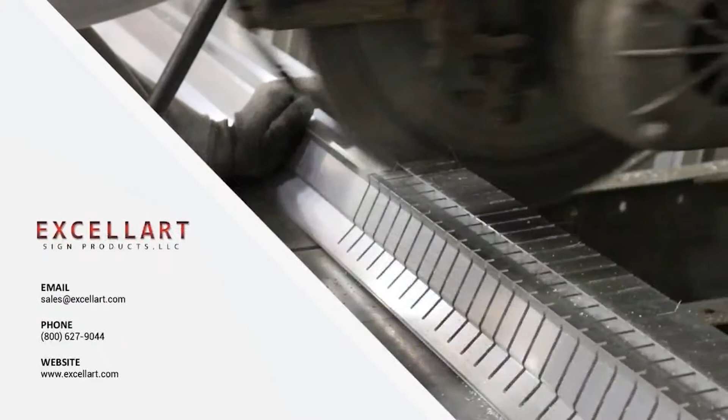Excellart Sign Products. We're located in Olathe, Kansas, a suburb of Kansas City, Missouri. The Ambrose family has owned the company for 30 years. They also own a packaging company that we run out of the same facility in Olathe, and we are very involved with Tyson Foods and a lot of those good food packaging companies all over the country.

We have updated our catalog, just updated in November of last year. I think you will find it very user-friendly. It's outstanding as far as information goes. We have every product line we offer, be it full-length product, knockdown kits, some specialty products like custom painting and custom kerf cutting, all available to you. You can download the catalog easily, and all of our DWG files are located online so you can access them easily and quickly.

Our leadership team, Matt and Michael Ambrose - their grandfather started the company 57 years ago. The neat thing is we still have the first customer he ever had in the history of him conducting business. So that's outstanding.

Brandon Gray is our production manager. Brandon's been with us for 6 years now, outstanding, very good at what he does. Jennifer Peterman heads up our inside sales team and customer service. Jennifer's been with the company 14 years, very knowledgeable with our product line. She can quote probably 90 to 95% of all jobs that come through her, and is outstanding at what she does.

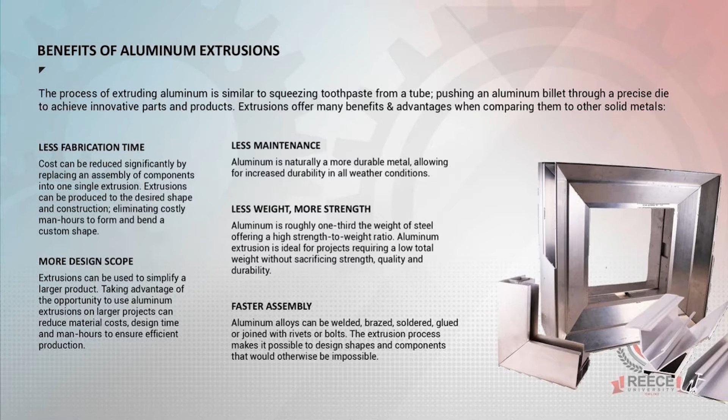Here's a big example of what we've done. We're a member of ISA and the World Sign Association also. We did a cost benefit analysis of extrusion versus stick build in the shop, and we basically did it across the country - in the north, south, southwest part of the US, California, Pacific Northwest, and the Southeast.

What we found is the cost comparison between a stick build sign and a prefabricated knockdown kit, even figuring in all your material cost and labor cost. We are fully aware labor costs differentiate throughout the country, whether in the northeast versus here in the plains states - labor is obviously going to be more economical. So we took that all into consideration, adding up the cost of extrusion and the labor and time it takes to fabricate it, compared with the cost of stick build, aluminum angle or square aluminum tube, plus labor. We came up with a 20% cost savings when you get to the end of that job.

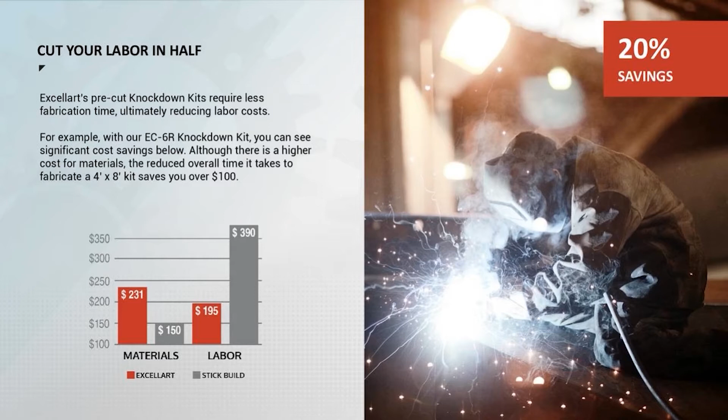What we do at Excellart, depending upon the month, you'll get a balance - let's say 60% of your sales one month might be knockdown kits, 40% full length extrusion, and the next month, depending on order ratios or what sign companies have going on throughout the country, it could flip flop - 40% knockdown kits, 60% full lengths.

All of our extrusions are available in pre-cut knockdown kits, and basically we can get you anywhere from 4 inches out to 17 3/4 inches with the frame systems we have for our rigid face. We have 4-inch single face or double face up to a 12-inch double face frame system, and when you pair those with our standard retainer systems, we can get you out to an overall depth of 17 3/4 inches with a rigid face. With the flex face, we can get you out to about 21 inches total cabinet depth, face to face.

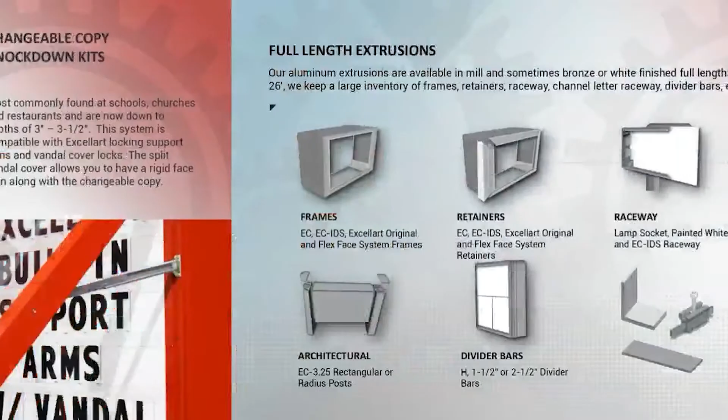As I stated, all of our full length extrusions at Excellart come in 26-foot stock lengths. We've got some new products that we bring to market that may come in at 21 foot or 24 feet, depending upon the waste - we try to reduce that as much as possible. The reason why Excellart full length units are in 26-foot lengths goes back to the days when everything was predominantly HO fluorescent in the marketplace, and we've just maintained that lineal footage. It helps us with overcuts, whereas overcuts for knockdown kits isn't as prevalent as it used to be. Still gives us that 2 feet excess, foot and a half excess to play with.

Divider bars - we have numerous divider bars: H divider bar, 1.5 inch, 2.5 inch divider bars. Channel letter raceway - we still sell the old 7x7 neon channel letter raceway, which is still popular with some old time neon guys that like that. A lot of the service guys still like the room and flexibility it gives them to get their hand in there without beating their hands up. We also sell a 4 3/4 inch by 5 inch raceway and a 4 inch by 7 inch raceway. We stock all three of those at all times.

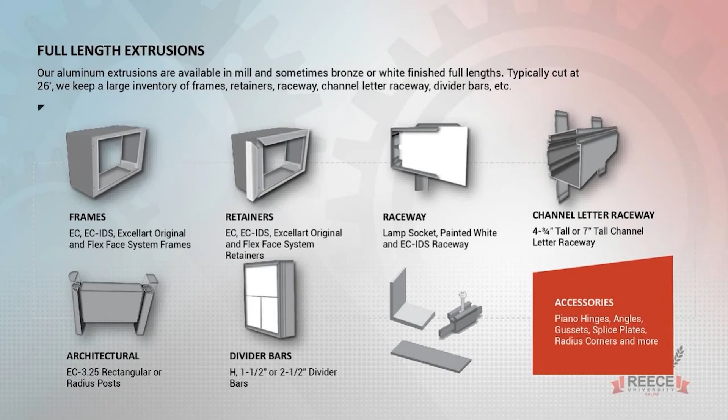The narrow wall mount system. This is a new product that we introduced in the 4th quarter of last year. This has been a great product for us. We've done numerous hospitals with the product, and the beauty of this product is the simplicity of it. It's basically a narrow wall mount type system, and we can get you as shallow as 2 inches with a rigid face or a plastic Lexan face, anywhere from 2 inch depth out to 4 3/8 inch depth.

We also have the flexibility of a flex frame system that mounts to that wall mount, and that'll get you out to 5 1/4 inches. The beauty of this product is that it hinges from the top. So with our hinge system, it'll hinge from the top, and the 2 sides and the bottom will be a solid retainer. So if you had FF hinged on the top, your 2 sides would be FF solid on the 2 sides and on the bottom.

That product comes in 21-foot lengths, and that was more for the first large program we did with that. It just allowed for... it was conducive to eliminating the waste for that particular job.

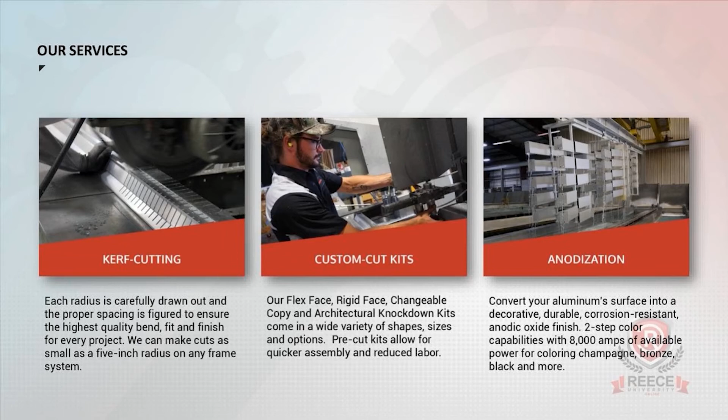Probably the biggest explosion we've had in business over the last 2-3 years has been our kerf cutting department. As I alluded to earlier, we can kerf cut every frame system we have on the floor here, and it's been huge for us.

And people, at first it was, okay, what are we doing with this, and where are we going with it? But basically every electrical sign company in this country has got very talented individuals that kerf cut on a daily basis, but it's very labor intense. So using us to do your kerf cutting to satisfy your kerf cutting needs, you're basically transferring the labor from your shop to our shop.

And it's a fascinating process. It's purely a manual process. It's very hard, even with the high-tech saws that you have out there, to do custom kerf cutting with automated technology. We do that to a point, but there also comes a time when you have to just get it off the automated saw, pull it down, and hand notch it like the good folks all across the country have been doing for years.

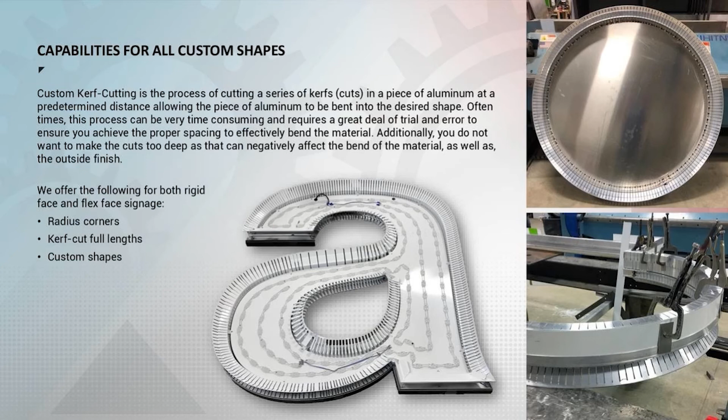The circle, the large circle sign up top you're seeing, that's our 12-inch frame, and we've had great success kerf cutting all of our frame systems over the years.

Probably the flagship project we did was when Cowboys Stadium down there in Dallas, Texas opened up, when Jerry Jones built that place, and the good folks down there in Arlington. So AT&T Stadium, we were fortunate enough to get that project, and it's been very, very good to us over the years.

And then about a year after we did the AT&T Stadium, along came an opportunity to do the Panther there at Bank of America Stadium in Charlotte, North Carolina. That was probably, from a custom perspective, one of the most enjoyable jobs the guys in the shop did.

That panther is actually 45 feet from his back to his left ear, and there were about 25 different custom radius angles kerf cut into it, with that panther logo on each end of the stadium. That was their most enjoyable project.